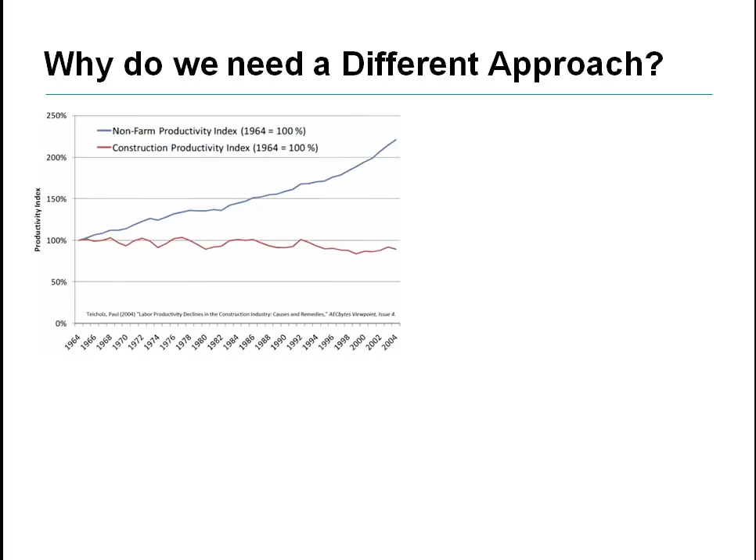This chart tracks the percentage of labor productivity gain over the last few decades. The blue line is manufacturing. The line we should be concerned with is the red line. Construction has essentially flatlined, even with the introduction of CAD and other technologies.

The pie charts below illustrate the level of waste in relation to value to the customer. Manufacturing has increased labor productivity to deliver well over half in value added to the customer per labor dollar spent. Construction, not so much. In other words, for every labor dollar spent, roughly 10% ends up being of true value to the customer. The rest is non-value.

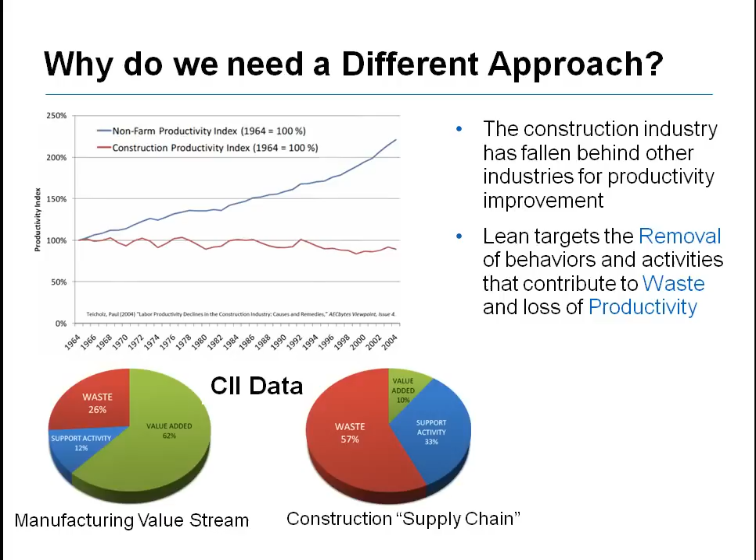So where does lean come in? Lean targets the waste that adds costs, drags out schedules, and compromises quality. Lean brings philosophies and methodologies that enable improvement and innovation from project teams.

So what is lean? The term lean was coined by a contingent of visiting American researchers who observed the Toyota process for building cars. Lean project delivery is a production approach applied to construction. The key principles are reduction in waste with maximization of value. However, lean is different from the traditional approach to saving money.

Lean project delivery is no more about cost cutting than weight loss is about amputation versus diet and exercise. Each approach may get you to a target weight. One just leaves you a little more functional than the other.

Previously, it was stated that lean challenges the generally accepted belief that there is always a trade-off between time, cost, and quality. But I had my own doubts. Even though I personally led a lean transformation for another manufacturing company prior to starting a career in project management, it hadn't dawned on me that lean also works in construction. That changed after I managed a project in Japan.

There I experienced a different project culture, one that focused on value and efficiency. Trust and respect was real and not merely an aspiration. The value of team over self-interest translated into a project that finished exactly on the date committed to at the project start and significantly under budget.

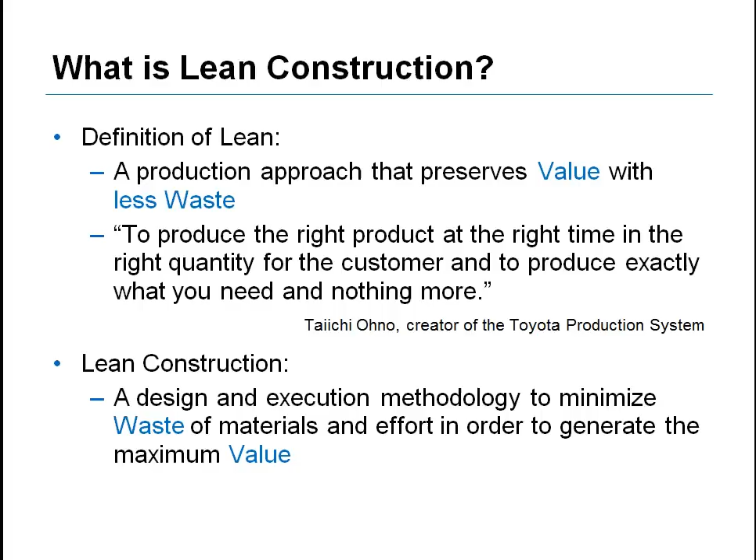A few years later, a team of us went to the leaders in industry to do our own research. Our team directly surveyed over $6 billion in installed lean projects and reviewed numerous published case studies. What we found was that lean projects were delivering project cost improvements of 5%, 10%, and even better than their company's previous benchmark performances. This next statement sums up the lean objective.

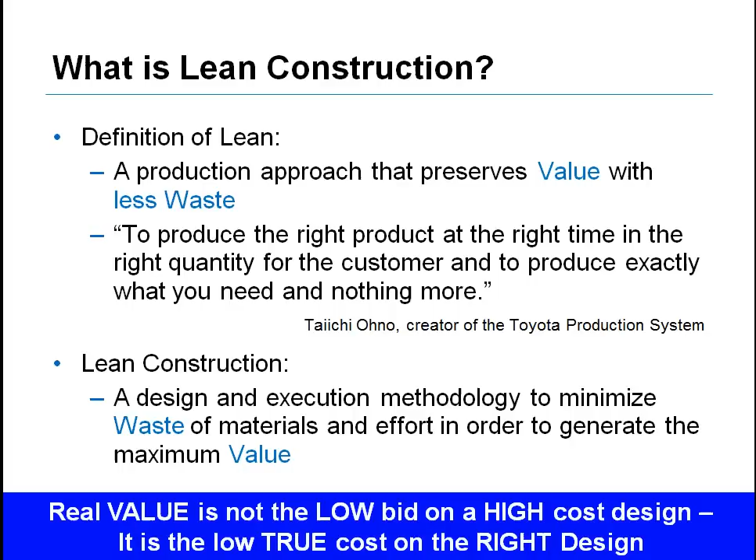Real value is not the low bid on a high-cost design. It is the low true cost on the right design. So let's take a look at what value is and isn't in construction. Value is defined as what the customer is willing to pay for. Waste is the non-value added cost.

The value added part of construction is fairly obvious. It is the erecting steel, pouring mud, framing, and other tangible activities. What is not so obvious is the incidental support activity that in itself does not add value, yet is necessary to support the transformation of raw materials into something the customer values.

I was explaining this to one of our PMs who challenged that these also were value-added activities. So I asked, did the customer keep or need the concrete forms? Does the scientist in the building care how many sheets of drawings are produced? The only thing the customer values is what he or she can directly use in their work. It dawned on him that although these activities are needed, they don't directly add value. Any activity in this category is a candidate for removal or streamlining.

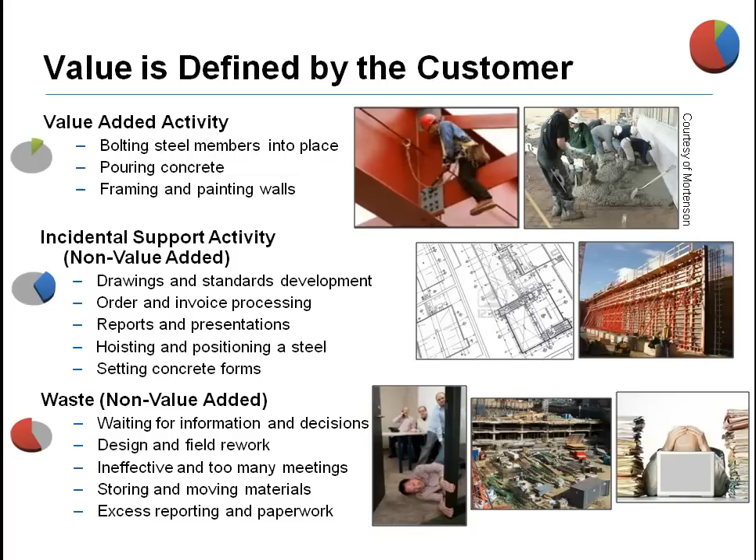Then there is pure waste. It's the correction of mistakes, the waiting for security to open the building to let workers in, the rescheduled meetings that result from key participants failing to show. It's the walking around search and rescue effort to find tools and parts, and the shuffling of piles of materials from location to location around the job site. And the owner pays for it all in the form of buried contingencies and built-in productivity factors.

So let's do a breakdown on the 7 wastes as they apply to projects. First, there's defects and rework, the scrapping or redoing work that adds cost with no increase in value. This is the rework of drawings and paperwork, the relocating of sprinkler heads after T-bar installation, the extra patch and paint done by others, and the rescheduling of meetings when required people failed to show.

Why? Out-of-sequence work, unclear or late information, late decision-making, inaccurate drawings, and poor quality materials. It is interesting to note that studies have also shown that rework is one of the demoralizing factors that lead to decreased productivity and job satisfaction.

Overproduction. The building or producing more than what is needed, or producing too early, which could lead to one or more of the other wastes. This can be seen in reports and presentations containing more information than needed or produced too frequently. Unused drawing details. Stockpiles of dusty and dirty unused fabricated assemblies because they were brought on too early, often resulting in scrap. And the unnecessary double or triple redundant systems.

Why? Over-design due to undefined requirements from the end user. The just-in-case logic that leads to designing more than needed, resulting in gold plating. It's where the additional dollar spent doesn't result in a real dollar in increased value to the customer.

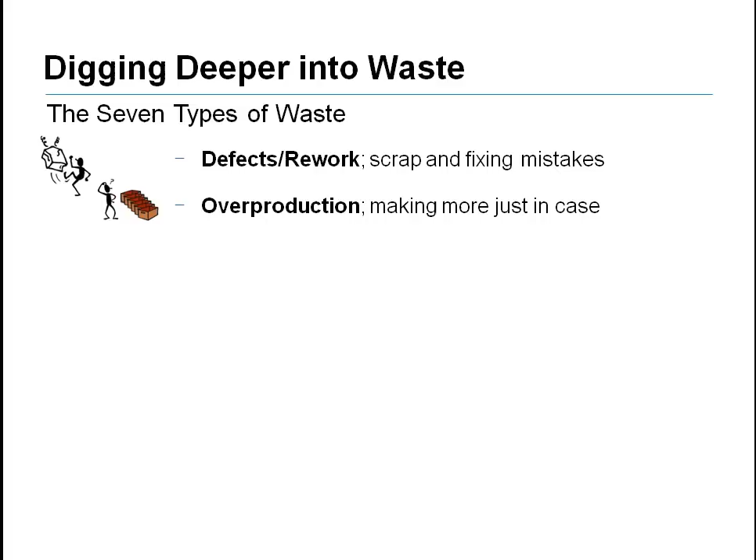Inventory or queue. The work stacked up too far in advance of when needed or in big batches waiting for use. This may trigger other wastes, such as unnecessary transport or defects from mishandling or contamination. This can be seen by documents such as RFIs, submittals, and POs stacked up waiting for approval and physically in stockpiles of materials or work in process held for long periods.

Why? Often because of mistrust. On one job, I asked the mechanical foreman why he had all his ductwork on site instead of having it delivered as needed. He said he wanted control of it. I counted one pallet being moved over 3 times before the material was used. This lack of resource planning ties up money and may result in other wastes such as having to move the stack around or replacement of dirty or dinged material.

Overprocessing. The performing more operations or using excessive specifications yielding no additional value. This can be seen in redundant reporting, red tape for onboarding staff, lack of clarity with paperwork, multiple inspection and approval steps, expediting of orders, excessive coordination required between suppliers, use of more expensive material, parts, or labor than what is required.

Why? Overcomplicated processes for approval, reporting, and administration. Lack of communication, mistrust resulting in more inspections and quality checks, and improper labor skill distribution.

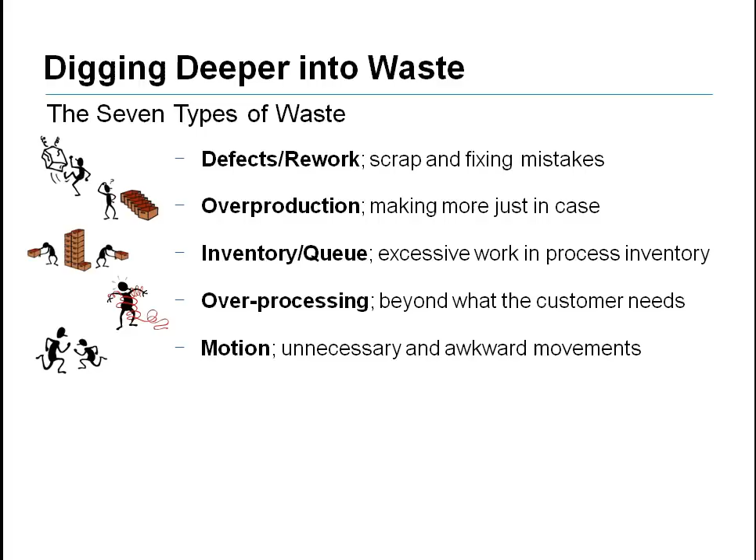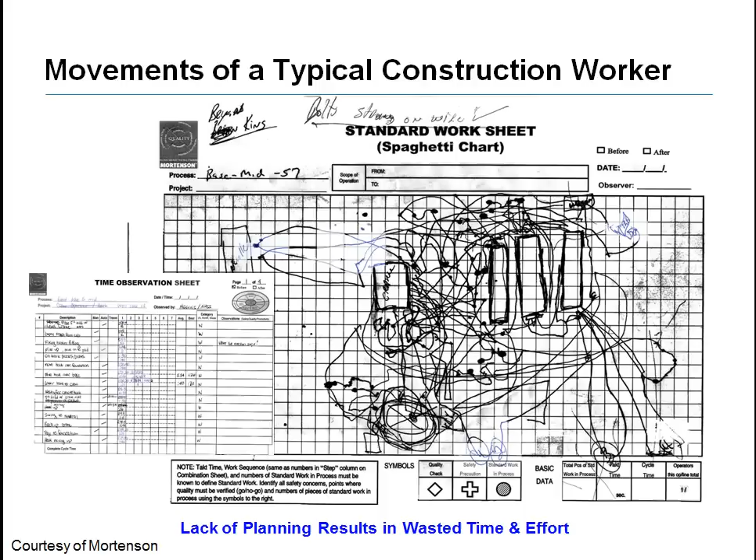Transport. The moving material from one place to another. It's funny why anyone would think drywall increases in value every time you move it. This waste can be seen in the excessive manual routing of documents, multiple moves of stockpiles, and clearing items out of paths of travel or out of areas of work. Why? Lack of process flow, poor site layout, lack of planning by foremen and/or supervisors, and early deliveries adding to the congestion to the site.

Waiting. The delay or idle time before a person is able to start the next activity. This is seen by the waiting for approvals, waiting for security to open a door for teams to start work, failure of a team member to show up, meetings not starting on time, missed or shifting deadlines, waiting on instructions, plans, or resources to do assignments.

Why? Late decision-making, inadequate coordination, no-shows or late attendees at meetings, broken processes and systems, and the delays created by drawings or RFIs released in large batches instead of in timely, smaller chunks.

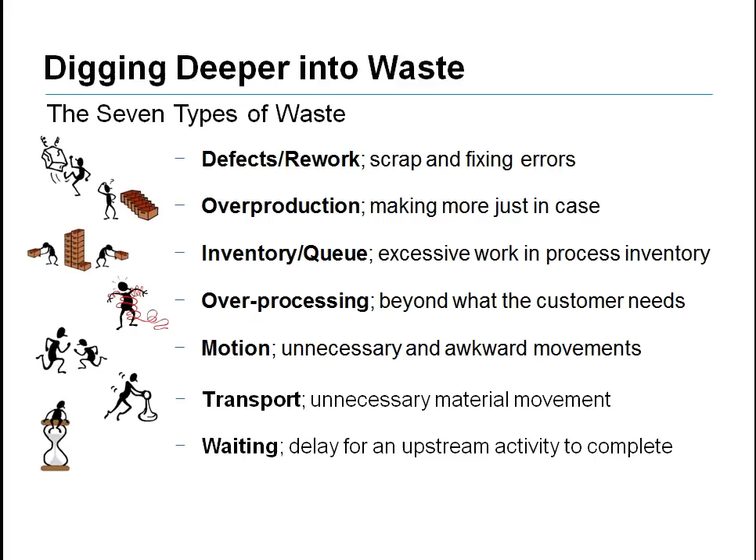There is one additional waste: unused human capital. The missed opportunities to create and implement ideas that could have reduced costs or increased value in the process. The symptoms of this waste are low morale, poor participation and collaboration, cynicism, and few innovations. And why is this? Some participants, including the trades and end users, are not included in design and problem solving. Continuous learning is not encouraged, and top-down management styles can hinder team members' empowerment to innovate and make improvements.

An example of how this waste was narrowly avoided was told to us while visiting a billion-dollar hospital program. It was their story of how seismic bracing was addressed. Originally, they were planning on using base isolation. However, during design, the team realized the building moving out of phase with the sidewalks created a real safety hazard to pedestrians. In one of the meetings, a junior structural engineer suggested using viscous wall dampers as used in Japan.

The senior lead designer neatly blew off the idea because it wasn't a traditional solution. Fortunately, the construction management PM kept the idea alive, which ended up being the only viable solution. The result was a significant savings in steel and concrete costs to the project. This innovative idea could have easily been missed because it didn't come from one of the senior engineers.

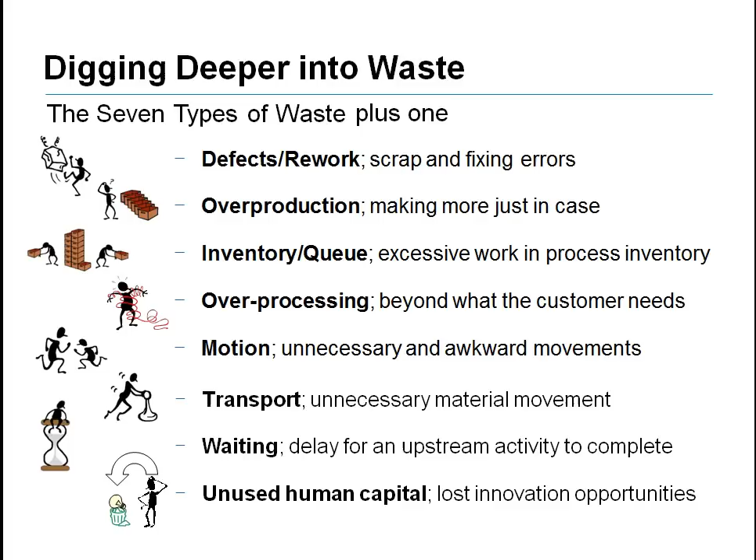However, a lean culture promotes inclusiveness and curiosity where all team members have the opportunity to be heard and to contribute. This eighth waste also impacts safety. A project can be exposed to disaster when team member voices are not heard, as happened with the 1986 Space Shuttle O-ring incident.

Why is waste difficult to see? Busyness. It seems like project team members can be like cars with low tire pressures that are too busy to stop to fill up with air. They are running with their engines redlining, burning up precious fuel in sore need of a tune-up. However, no matter how counterintuitive it feels, a lean approach means going slow to go fast. It means taking the time to stop to make improvements. And then there are those few people who just don't want to put the effort into learning and changing. These types you don't want on your projects.

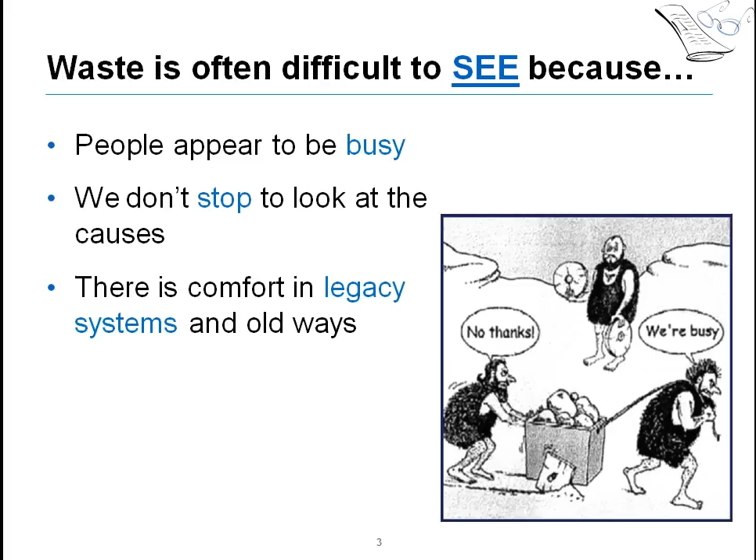In fact, on several of the projects we visited, we were told of those former team members who would not embrace the lean approach that were voted off the island by other team members because these laggards were hindering adoption of improvements and costing the team and the owner money.

I recently spoke at a conference on this very topic of lean project delivery, much of which is what you're watching now. And the question usually arises, will lean work in pharma construction? Some of the arguments I hear are, we're not Toyota. This was the argument 20 years ago in manufacturing. But today, just about every company that has stayed in business has embraced lean and Six Sigma to stay competitive.

We're not manufacturing. This was the argument hospitals were giving 10 years ago until the cost of health care forced many of them to adopt a lean approach to construction, such as Sutter Health and Universal Health Services have. We're not hospitals. Other sectors, such as public schools, community college districts, and major theme parks have made lean the preferred approach to constructing and improving their facilities.

We're not, well, you can fill in the blank. Needless to say, there is a tremendous amount of waste in how pharma facilities are built and renovated. The opportunity for savings is ripe for those who will take it. All right, I'll give it a try. No, try not. Do or do not. There is no try.

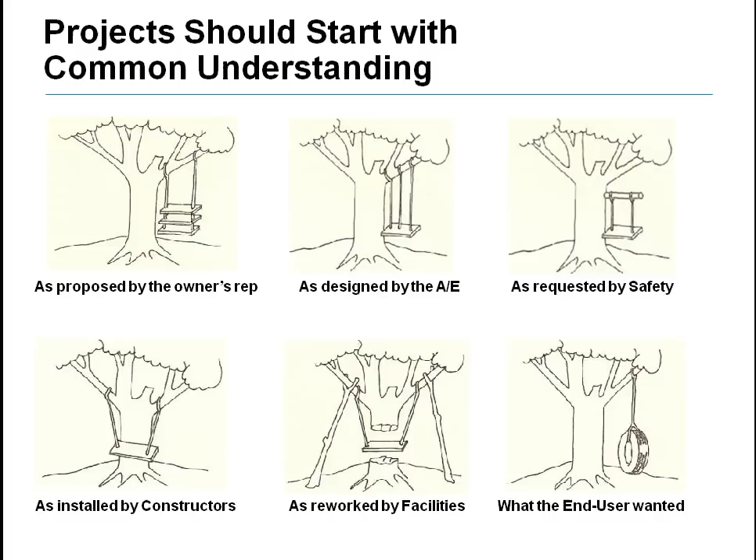Project team members should start out with a shared understanding of their objective. But sometimes things don't always work out as planned. Why? Because information is often missed in the handoff between team members. Now for a typical project arrangement. We start with the owner, designer, and constructor, but it is more complex than that. The owner has equipment suppliers and consultants. The designer has their own consultants and engineers. And the constructor has a multitude of contractors, trades, and subtrades.

So how do we improve information flow? Let's start by looking at how projects bring on team members. Obviously, it is not until a member joins the team that they will have an understanding of what to do. A traditional project looks something like this. First, the owner brings on the designer, then some engineering, then the CM, and finally, at execution, the trades who will actually construct the facility.

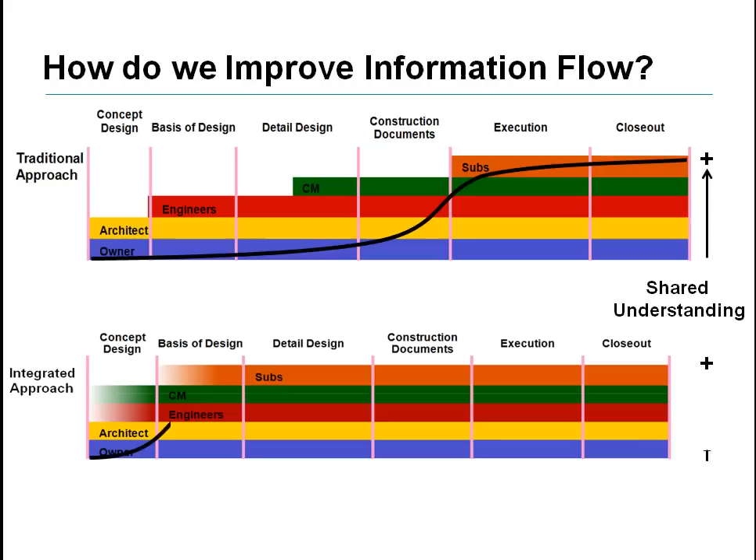Lean projects begin with a soft start, which is more than just a team builder. A soft start involves all the major players to develop what is called the conditions of satisfaction. This resulting statement clearly lists out what success looks like for the project to ensure alignment and as a compass for true north understood by all on the team. The benefit of IPD is an earlier shared understanding to deliver the right design with less waste.

Another way of looking at the benefit of early team involvement is the front-end loading effect. Right decisions made early are far less costly than those made in the later phases of the project. A traditional team of decision makers ramps up like this. The IPD approach brings decision makers and influencers, which includes those from the trades doing the execution, on much earlier. Man-hours are front-loaded. Nevertheless, the total hours will be overall less than the traditional approach.

The concern some people have for early onboarding trades is that it will cost more because we as the owner lose our leverage of getting a competitive bid. However, experience has shown that when trades are selected on a best value basis to participate in early design, we get a better design, fewer costly design decisions late in the project, and a better project outcome, including an overall lower cost.

Again, let's look at a typical project team. We start with the owner, designer, and constructor. On equipment-intensive projects, we may also include the OEM supplier as well. The IPD approach brings these members together as a core team. Then we include the trades and engineers. On larger projects, a big room is used to co-locate team members to increase effectiveness and information sharing. Also, contracts are drafted to minimize conflicts and remove barriers to collaboration, which we will look at in a few moments in the commercial terms section.

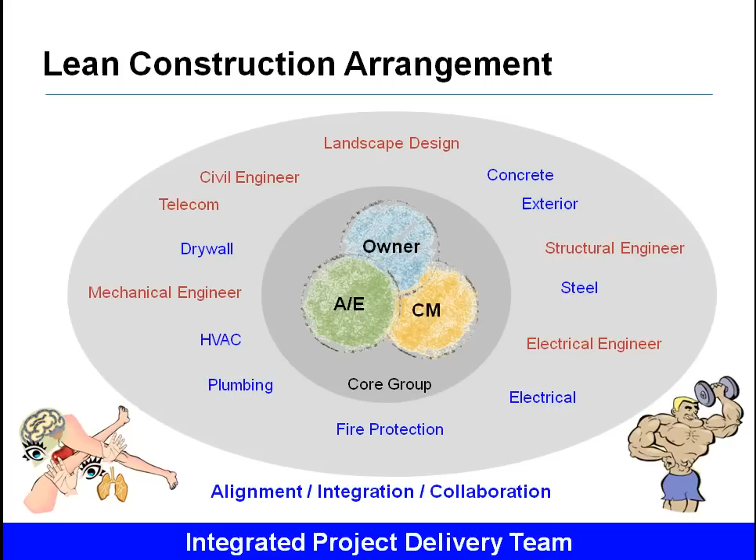Unify the parts and a magical thing happens. It gains life as the parts interact and support one another. Only when the body is whole can we say that it is a human life. The whole is truly greater than its parts. The time spent on developing and fostering a healthy team environment is one of the best investments a project can make to eliminate the waste created from misunderstanding and misalignment.

In summary, for the organization side of the Lean Triangle, Lean teams are different. The team structure breaks down the silos so that the work is aligned toward a common goal. The focus is on maximizing the project instead of protecting self-interests. Leadership moves from being top-down, command and control, to one of collaboration and listening. Commitments move from being purely transactional to being relational, where team members help one another in achieving a common goal of project success.

Learning becomes a goal, and failures are used as learning opportunities for continuous improvement. A no-blame culture makes this possible. An integrated team in a culture of trust is foundational to a positive project outcome. Without an integrated team, as stated earlier, the rest of the Lean methods and contracting will be only marginally successful.